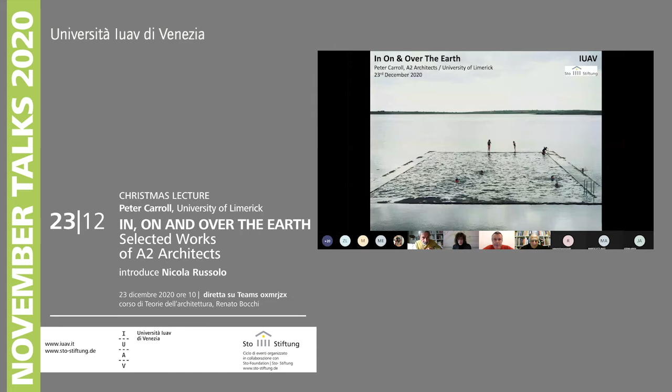So I'll begin my lecture. I want to open with a photograph by Anthony Haughey, who's an Irish photographer. It's a photograph taken in 1996 of a sea pool in Belmullet in County Mayo, the northwest of Ireland, an estuarine bay where a river feeds into Blacksod Bay in Belmullet.

I open with it because it represents many aspects that I have begun to focus on much more in our practice, to do with weather, with the scale and geometries one finds within landscape, but also the relationship between the man-made and the natural. Not to be too simplified about it, but this is a pool, a liminal pool I would say, where you are seeing the moment where the tidal waters reach the height of the contained water within the sea pool.

It's a concrete rim that's showing, but you see the footprints and the action of humans, both walking around the lip of the pool and also swimming within it. So you have this amazing moment where you have a still body of water with a ruffled water surface within the pool itself. For me, it encapsulates so much about landscape being about detail, but also being something epic.

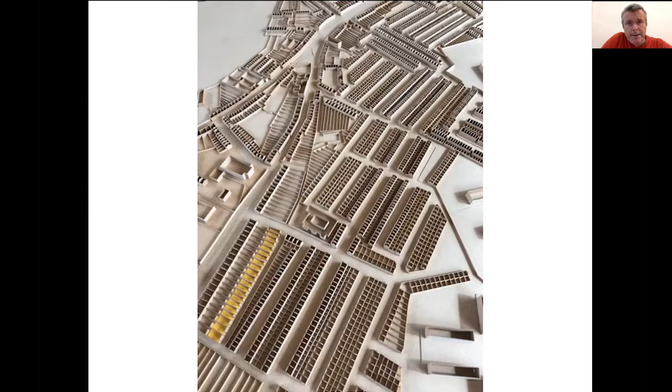So in many ways one might think of this as a very urban project, but I also like to think of it as a landscape project. In order to register that scale of landscape, as Nicola said at the outset, we make a lot of models in our office, and this is a model looking from north to south.

Here you have on the southwest of the image the terrace of new housing we were proposing in the very long back gardens of houses on Oxmantown Street. What we were trying to acknowledge within this model was effectively the 2,000 homes that live very densely—they don't have front gardens, they have yards to the back, and they're tightly packed with one another, making for an amazing sense of neighbourhood, where any nature within that is prized.

Our interest here was very much about garden walls and ensuring that the house we developed for this new lane called Lucky Lane in Dublin 7 was intended to go beyond its plot and somehow inform the context of the urban landscape.

Very briefly, there's a section on top and a plan of the first floor, and on the bottom of the image, a plan of the ground floor. It's a very simple house, cellular in nature on the ground floor with 2 bedrooms, a study and 2 bathrooms. On the first floor you have a very open kitchen, living, dining space.

In the plans of the plots, there's an interest in making more ambiguous the nature of what a plot division is. So you have part of a plot wall that begins in one house, comes along, makes the boundary division, and becomes the envelope for the other house. The intention was to show an extension of the house into the gardens, and to engage with the city landscape proper.

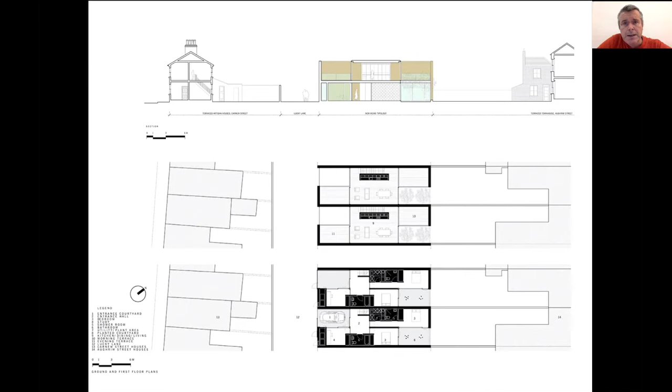In the section, the more cellular rooms of study and bedroom are on the ground floor, and on the upper floor it's meant to register the orientation and the sunlight to the house and to the city proper.

When you look into the house itself, it's very simple in many ways. It goes from plot wall to plot wall. What we were trying to reinforce within the house was an interest in span from one party wall to another.

The windows would be systematic in many ways - large sheets of glass that would move and slide, but would reinforce the relationship of inside to outside with these large brick walls that were reinforcing the plots to the houses.

When you go into the ground floor, as I said, it's cellular in nature. The hall is wrapped in birch plywood. The polished concrete floor goes from room to room so there's no division whatsoever - it's a continuous flow. Likewise, over the doors there are no door heads; the ceiling runs from room to room to give it that sense of expanse.

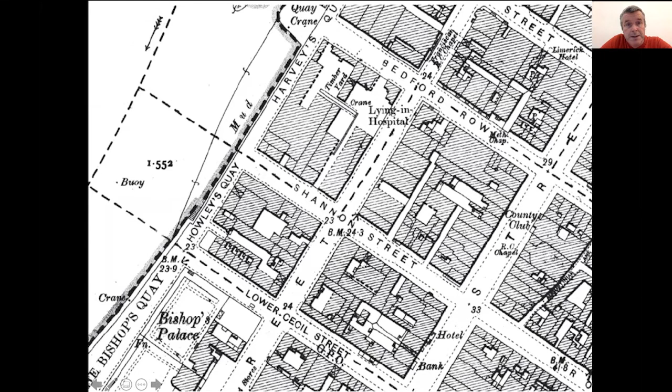What I found over time was that through the opportunity, or the threat, of roadworks and the damage they were doing to the groundscape of the city, all of these culverts and cellars were being revealed through the need to reinforce sections of road. This was a sore point for many within the city, but it was also an opportunity to realize there's actually an incredible substrate to this city that somehow determines what is built above it, but also manages its relationship to flooding, to waste, and to our ability to inhabit and use the public realm of the city.

This was like a moment where I felt there was a whole Roman catacomb system under the city, where you get the top layer of the road simply removed, and you have these amazing brick arches that spring from calp limestone walls to what would be the natural rock level of the city.

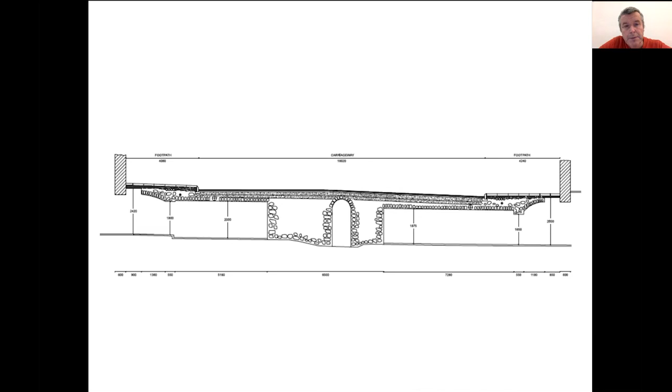When one thinks about this on a Georgian scale, you have this need to make the groundscape. This is a section we did in the university to try and understand a sloping substrate towards the river of the Georgian city, and the need to make a whole system of cellars and culverts that would enable the foundations for these amazing gridded blocks of Georgian construction.

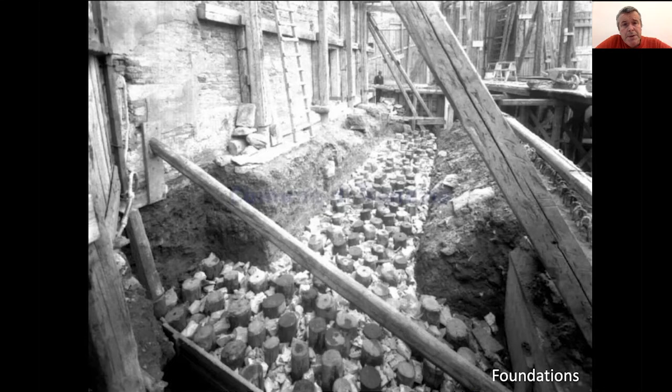Going from that, there was an opportunity 2 years ago to contribute to the Venice Biennale, where myself and Kevin Callahan, an Irish artist, were asked to contribute to an exhibition in the Palazzo Michiel dalle Colonne, on the northern bank of the Grand Canal, just east of the Ca d'Oro.

We started the collaboration by trying to understand again the precarious nature of ground. For Venetians listening, you'll be familiar with this staking or piling of the ground with large poles from trees in order to establish the ground level of the city of Venice. It's always been a very compelling image for me, allowing for consolidation and the ability to spring from a ground condition up.

These are works that were revealed during enabling works for one of the fondamentas in Cannaregio, as I remember. It did reveal a fascinating landscape and substrate to the city of Venice as they began to repair the edges to the canals. So part of this, you can see the arrival of our piece into the Palazzo Michiel.

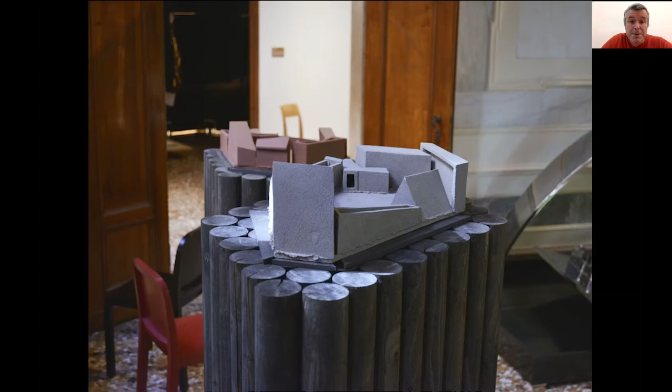What I particularly like about this image is the terrazzo floors and the relationship of our pencil pin points to this particular floor. I did enjoy very much the establishment of these pieces on the ground, negotiating with the Palazzo Michiel the relationship of our piece to the floors. You can see Kevin's pieces then on top of this new datum that we were making for the sculptural pieces within the palazzo.

To go from there to a project that has remained dear to us, in the context of consolidating ground, much like Limerick and our Venetian piece, this was a competition we did 3 years ago in the city of Cork, otherwise known in medieval through to early Georgian times as the Venice of the North, primarily because of its networks of canals used to establish transport through the city.

A lot of these canals and roads are now roofed over and culverted to provide for streetscapes. But the area to the south of this particular map from 1759 by John Rocque is an area known as Morrison's Island. In this map, it shows as mud flats, but prior or subsequent to this map being made, it was actually consolidated in a similar way to the Venetian landscape, where they piled into the ground and edged the island with limestone walls.

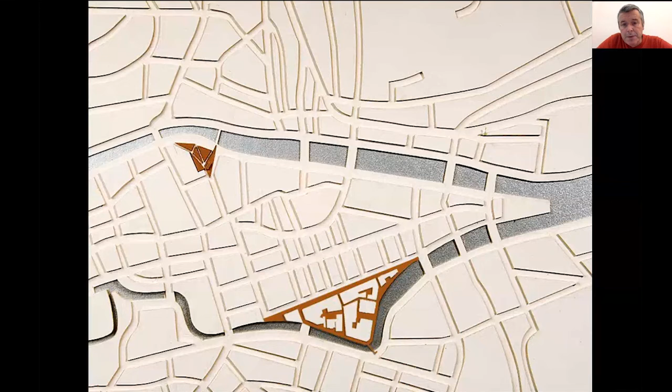One aspect that we started to get very interested in was this notion of using wood for paving. You can see in this image a desire to use end grain woodblock, a hardwood with an impregnated finish, with gravelled and blinded gaps and joints between the timber blocks in order to ensure a permeable surface, so that the ground would operate as a sponge, able to absorb the water coming from both the ground and from the rivers during times of tidal surge or otherwise.

We were looking at cities like Paris, where there is a hierarchy and a relationship from the river level up to the river banks, and then higher up further onto the street levels, where you're getting an integration of nature and planting, but also leisure into the city, and ensuring that all can survive depending on the relative nature of the water level around the city.

We were looking at swales and how to absorb water into depressions within the ground in order to ensure that there was opportunities for water to be absorbed.

We were also looking at corner moments within the city where you might introduce fountains. For the Italians listening in, you'll be very familiar with San Carlo alle Quattro Fontane in Rome by Borromini - forgive me, please. This is one of those moments. I know the interior of the church is a spectacular moment, but I particularly like the civility and the elegance of providing for fountains in corners. It's something that we have in some ways forgotten about in our city landscapes. This is a moment where you're acknowledging the need for a drink of water or the need to wash your hands within a city, and that it's a civilized moment and it's decorated as such.

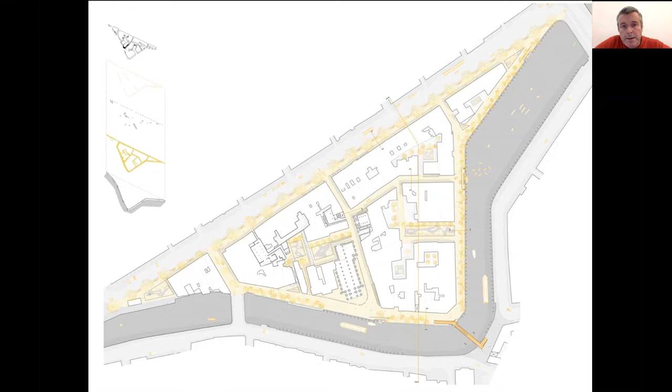In doing so, that opened up the laneways and the spaces between buildings in order to revitalize, as well as to bring in a greater sense of permeability into parts of the city that were not known up to that time, and give it an identity.

So here we were looking at varying levels of plants. We were particularly interested in plants that would deal with alluvial water, as well as the marine water coming in, so it needed to be able to deal with an intertidal water condition. You're getting everything from shrubs and grasses through to plants and flowers, through to fruit plants and through to taller plants, trying to find that balance as to doing as little as possible in order to give a maximum impact. It was a very enjoyable project because it got us thinking about small moments within a city where you can make a small intervention, but it can have a much larger polemical impact by altering people's perceptions as to what can happen within a city scale.

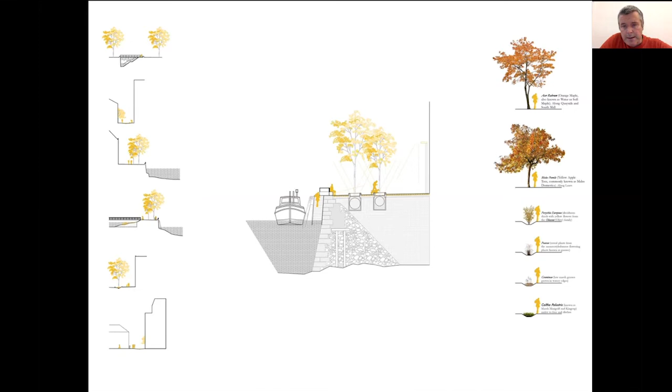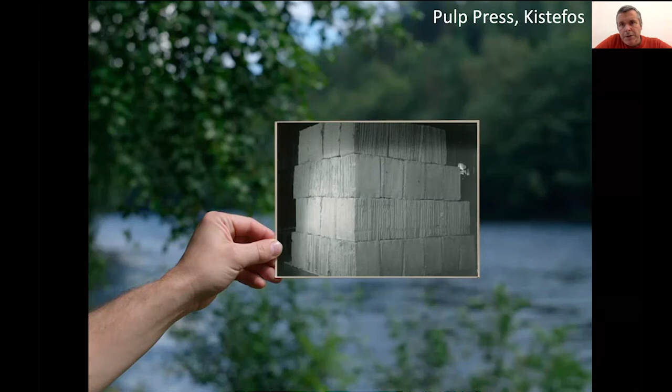Going from that into another project that registers water, this is a project we collaborated on with John Gerrard, the artist. John and A2 Architects were invited to locate, read, and try to register this particular context we were working in. What you have here is a photograph John was holding up, looking towards the river Randselva that passes through Kistefos, and it describes bales of paper.

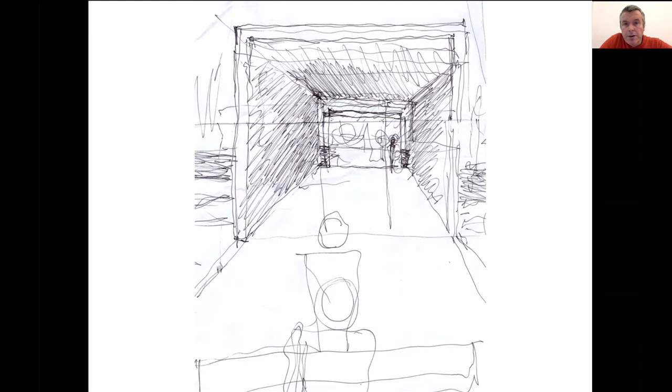With that in mind, we developed an enclosure for one of John's projections. This is a sketch of a perspective looking towards our intervention onto the river Randselva, which flows quite fast beyond the pavilion. It was meant to be a framing of John's real-time projection of the paper mill process, which he did in great detail. But it was also for us to calibrate the relationship between his artwork and the nature it was being placed into - a kind of deep cave, a very simple portal that looks...

We cannot hear you, Peter - your microphone. Can you hear me now? Yeah, okay, now it works. I don't know what happened there, apologies.

This is particularly interesting in its setting in that it looks northeast towards the river, which up to this point is quite wide, and would have been used for the transport of logs down from the forests towards the paper mill plant. This particular jetty would have allowed for the collection of logs as they floated down the river towards the mill. Beyond this point there's a hydroelectric dam, which processed the water and its speed in order to generate electricity for the paper mill.

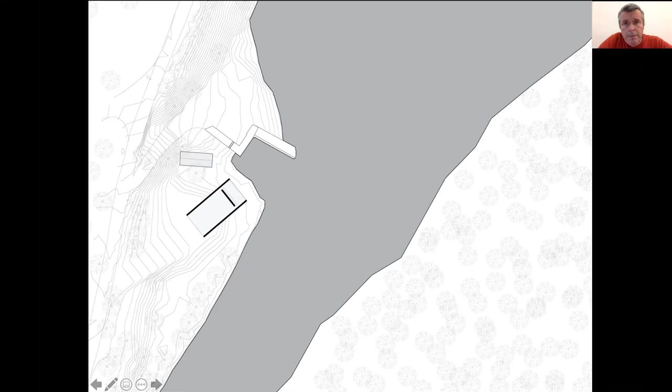Now you might be asking why - I'm just having difficulty going on to the next image. It's not allowing me to go on. Sorry, Nicola. Can maybe try to close this and open again. I'll try to retrieve your presentation on my computer. Yeah, if you could do that. I don't know what's happening here, apologies about this. Okay, let's try. You want me to do it? I can do it. Let me try. Here we go, I have it. Does it work? Okay, yeah, no that's fine.

Thank you. So these are very simple roof plans, elevations, and a side elevation that shows the pavilion - effectively two walls, a ground floor, and a roof. What this ground floor does is register the 50-year flood level of the River Randselva, which was very important since this artwork needed to survive 365 days of the year within a pretty harsh landscape of snow in winter and more extreme heat in summer.

So our project very much became about registering flood levels. We established the height of the pavilion in relation to the river level pretty much from the outset. You can see here the manipulation of the roof plane itself in order to house the projector that would project John Gerrard's artwork.

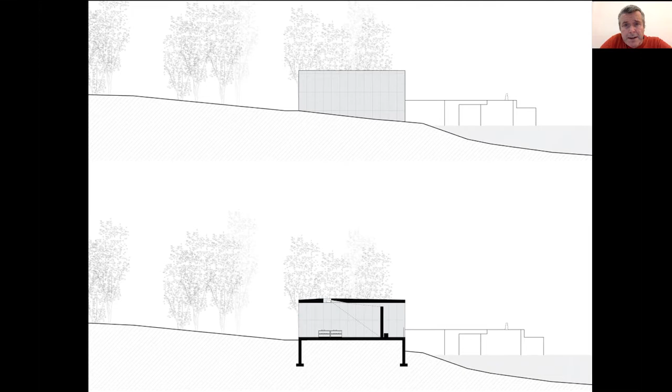It's a very simple concrete box. We showed the patterning of the concrete, and you may see there's a very strong leaning towards Donald Judd's work, particularly in and around Marfa in Texas. We were quite interested in the very elemental nature of this piece.

We carefully crafted John's image to ensure that it would bleed right to the edges of the walls. So you have this almost surreal relationship between the video simulation of the paper mill process itself and the flowing river behind it. It's very much like the sketch that I would have shown you at the outset. It's a darkened cave. We pigmented the interior of the cave with a black pigment in order to allow for the survival of the image.

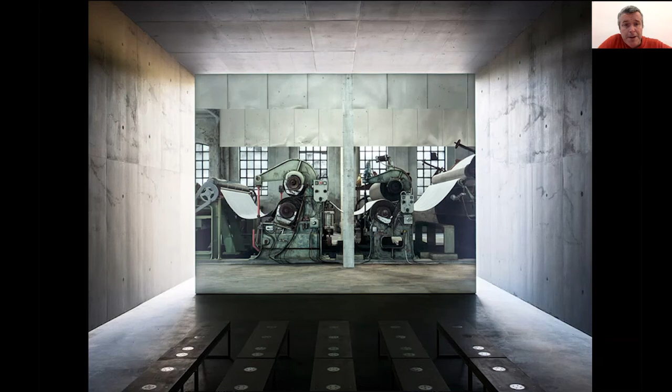Coming further into the pavilion, you can see a number of planks and benches that are made in precast concrete with brass legs and aluminium plates.

Each of those circles effectively are to be embedded with a box, which I will show you in a moment. The boxes basically contain the memory of the video simulation for the year. So it's effectively like a data center or a data bank, where you're providing for a bank of these very simple brass boxes that are to be fixed and connected onto the river.

Every single piece of paper that is made in this video simulation is different. So there was an incredible amount of effort and work done by John to ensure that this was a proper, unique reading, as much as a memory of the paper mill itself.

What I like about this image, again, is just the view that you have to the edge and to the river, where you're both seeing the image of the projection itself, but you're also hearing the river, and what generated all of this paper and the life of the paper mill itself prior to it turning into a sculpture park.

These are the boxes, and you can see in the first year the placement of one brass box on top of these very simple precast concrete planks onto brass legs, which we had made locally.

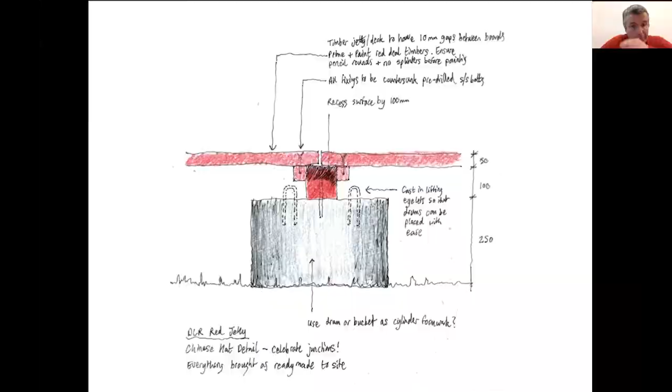These are observations of an action we did to determine how people might use it. There were opportunities when kids would run down the planks, or when foreign students in Dublin would gather for beer or cigarettes, or old people would have a coffee.

The nice thing about this was that it moved around the county for a year. This was in Marlay Park, an area fronting a very beautiful house, an opportunity to place a public bench to inform an edge of a park. Again, every age group was occupying this - it wasn't just for adults, it was for kids as well.

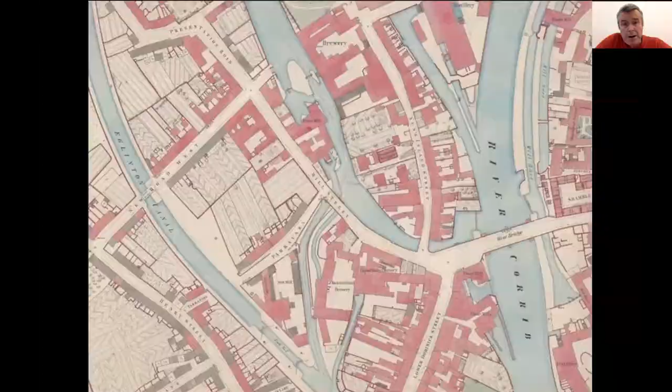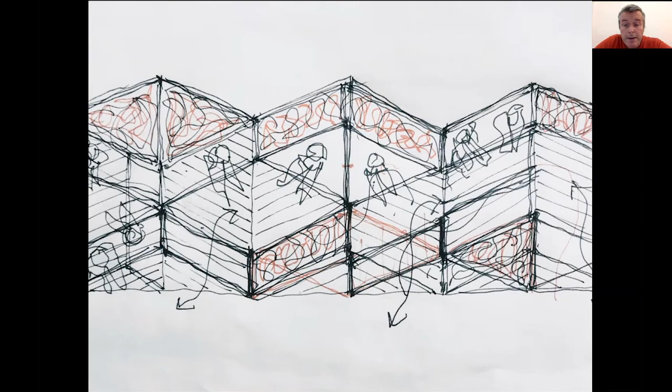This was an opportunity also to look at bicycle stands, and this was what we were looking at for Salt Hill, where we would be making a bank of planters that would protect the bicycles, acting as a crumple zone for cars if they were to crash into this, but also extending the public realm of the promenade and allowing for a herringbone pattern to the flooring of the bicycle stands themselves. What you'll see here is an interest in relief, in profile.

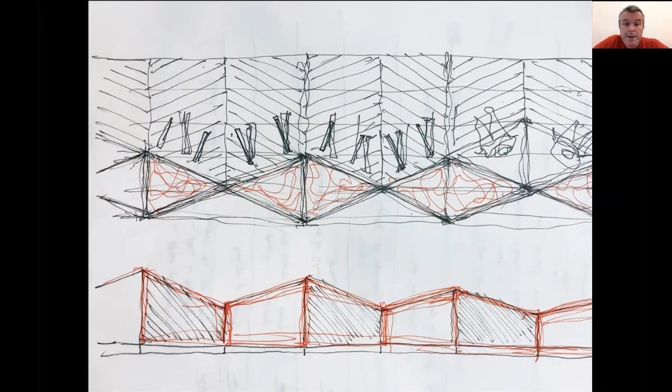We were looking at the work of Constantine Brancusi and his infinite monument, and we were quite interested in the relationship of profile, of landscape and topography, and colour to Galway. Galway is a coastal city on the west of the island of Ireland, quite different to other cities in its very direct relationship to both weather and to its coastal location. So we were very keen to try and find a microcosm to express that condensed mini landscape.

So just a few models to bring you through. I won't spend too long describing these, but these are effectively folding planes that fold in the two-dimensional plan, but also in section, to make for occupied edges.

Here we were looking at the Cruinniú na mBád, the gathering of the boats. There's a very beautiful book called the Galway Hooker, about the Galway boat, and we were very interested in almost bringing that to the imagination of people both living in and visiting Galway, so that they would see that almost clear image in their minds when they would look to something like this. You can see again, it's faceted to both the riverside as well as the promenade side.

So what you're getting here is a number of folding mini landscapes, much like a microcosm of the coast, where you're getting inlets and also islands of planting. Here we are topping the seats with rilled limestone from Ballinasloe, Galway, and we're also prefabricating these units presently in steel, in a marine grade stainless steel that are to be powder coated.

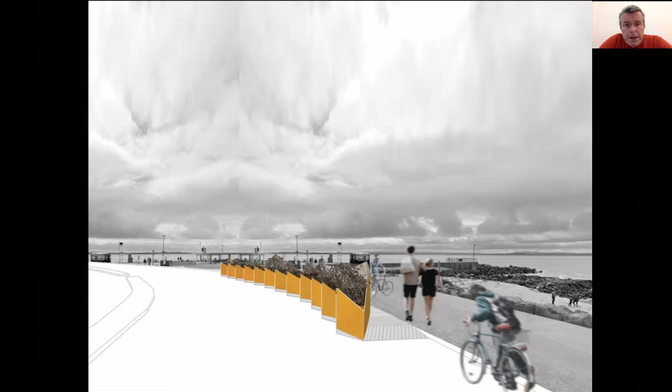Some perspectives to show the relationship of these liminal edge conditions. Here you have the Salt Hill Promenade and its relationship to the road, the promenade on the left, the Galway Bay beyond, and the horizon of the Clare Hills further beyond that. And looking towards a diving point, this is Blackrock at the very end of the promenade, where you look out to the Aran Islands, with the profile of the Clare Hills from the Burren on the far side. Our interest here was in bringing in some granite, given that it's a granite geological base on the Salt Hill side of the city.

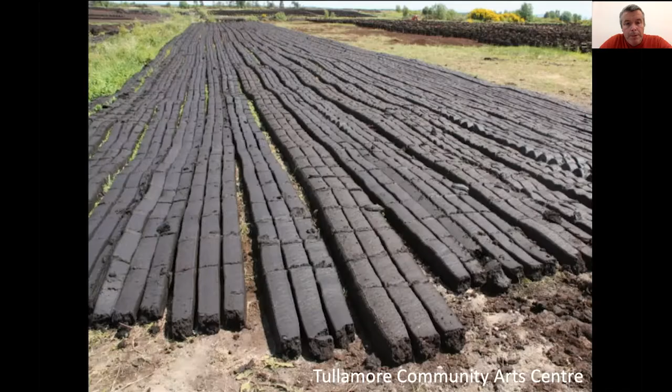Taking you in another direction, this is a project in Tullamore in the centre of Ireland, a competition we won a number of years ago for an art centre. The image I have here is of a bog cutting, where the ground is effectively scraped, and you have these logs of peat, a natural sphagnum compressed into turf that can be burnt. It's a low grade fuel, but it was a very important fuel source for many households in Ireland over the centuries.

What I find very beautiful about this is the striation you get, very much like the maps I showed you at the outset of Stoneybatter, this very strong, almost abstract grain running across the landscape at an unusual scale. The colouring of the landscape is brown, and the scaling of these briquettes or logs of turf, taken from the ground and machined, is in some ways quite phenomenal. The unitised system of these logs is also notable in terms of the increment of a piece of fuel. People come out months later when the peat has dried out to turn the turf and let it dry further, and you get these amazing stacked columns of turf.

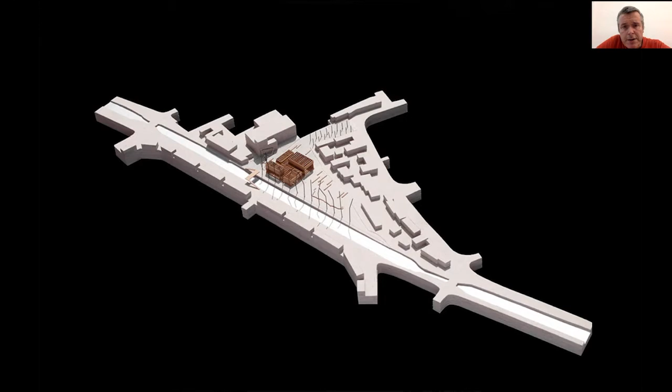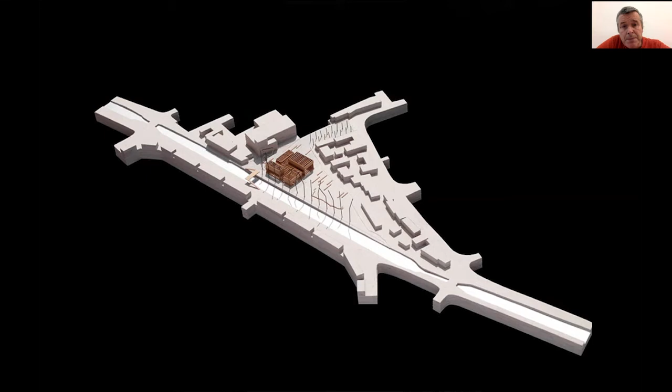It was a site that was unusual, called Kilbride Park, but it was formerly a landfill dump — people dumped domestic waste into a pocket of ground that was formerly a quarry used for building bridges along the canal. The canal park side was infilled maybe 20 years ago, the landfill was topped and it became a park. Part of this proposal was to offer a community arts centre for Tullamore town. So you'll see quite immediately there's an intent here to register the geometry of the canal as it goes through the town, and that was the primary interest we had in this project.

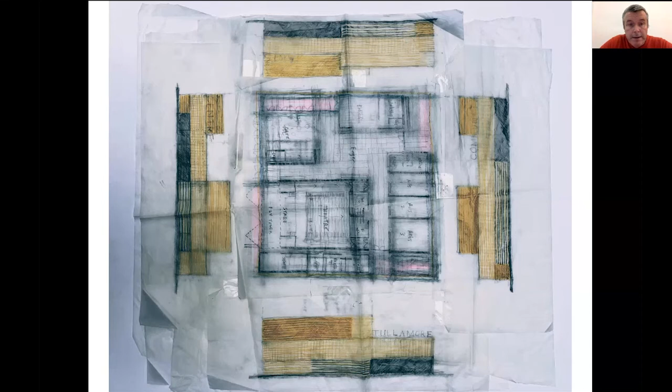So we were placing this very Cartesian, simple form within the park that was square, 40 metres by 40 metres. Within that, we would make a pinwheel, much like the Triskelion patterns of the Book of Durrow, off which you would spin the exhibition space, the cafe space, the theatre space, and the arts spaces. All of the elevations then would somehow register that striated, almost sedimented nature of the bog, and how you might be able to work with horizontal lines of varying densities.

So the setting within the park was very much to be seen as walls as opposed to a building, with a permeable edge. What you see here is an interest to direct various rooms out from this central foyer space and into either of the 4 spaces that we were making, or out into the landscape of Kilbride Park and onto the Grand Canal to the north.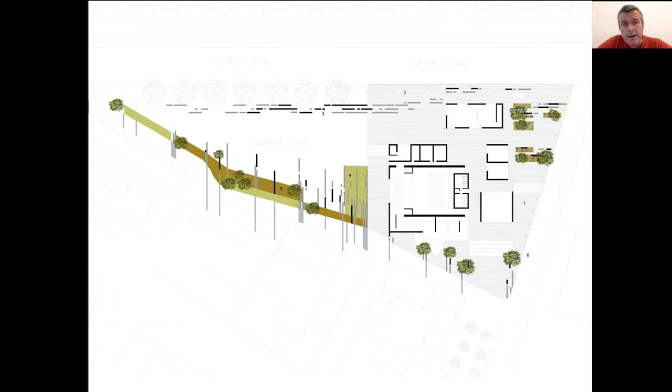So again, it wasn't meant to be just a building. It was a building within a landscape, within a territory, and we were very keen to try and register that almost epic scale of the bog within this relatively compressed site in Tullamore.

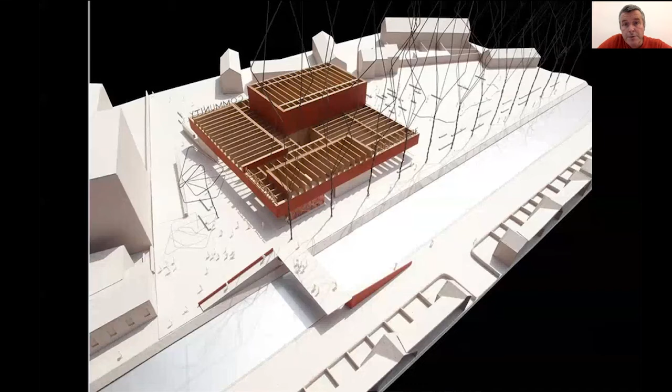And that developed into an interest in terracotta and marl, and we made this floating skirt around our proposal with timber beams that would pinwheel in and around from a central foyer space, making for all of these spaces that would allow people to flow in and around the art centre while relating to this body of water, the Grand Canal, as it passes through from Dublin to Shannon Harbour.

And another view of that. You can see in the terracotta cladding a desire to register varying densities of terracotta panelling onto the timber structure of the building itself, which had this concrete socle.

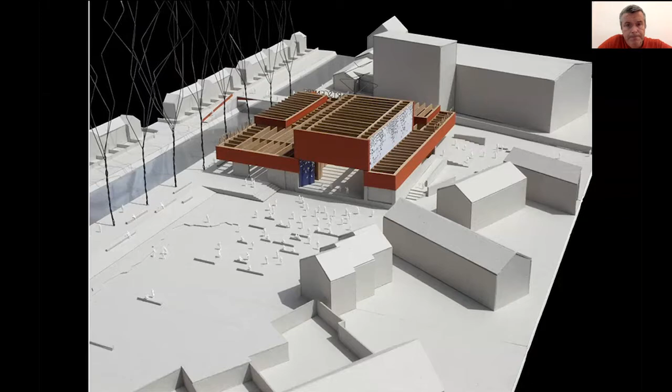Speaking of lines in the landscape, this is a house that we would have completed a year and a half ago now. And this photograph, I suppose, tries to establish and register a critique of housing in Ireland, particularly in a rural setting over the last number of years. We have, one would say, blighted our landscape with many bungalows, which are generic, carbon copy cookie-cutter housing from pattern books almost, where people would just be given permission to build a house. And they've become the norm, unfortunately.

That has slowly become something that, as a practice, we have begun to criticize. I suppose this was an opportunity here to make a house for a couple who wanted to live in relatively close proximity to the landscape itself, and also to be able to register things at great distance, such as the Twelve Bens or the horizon of the water beyond the house. So there was an opportunity to make something that would be quite small in its footprint, but allow for the landscape to be taken in at a much greater scale.

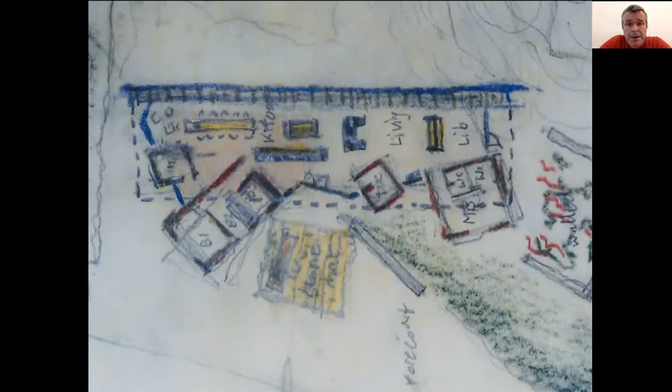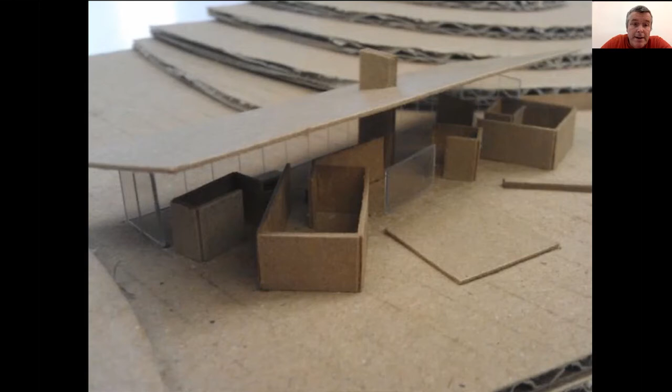Just to show you two sketches as to how it would have started. The house itself started as a number of erratics or blocks that would have contained the bedrooms, the toilets, terraces, utility spaces, and towards the sea front we would have placed this glazed screen. That was modelled in a way almost like a large monopitch of Liscannor slate that would fall down towards the sea, but that would open up to the back of the house to the south, with all of these protected spaces for planting. The clients didn't buy into it, unfortunately, and we had to go through many iterations and arrive at a very enjoyable conclusion, I think.

Just to show you a number of photographs here, this was a photograph of the house under construction. I think the moment of truth came where we were making a beam that was the first move of the house, lightly supported on piers and columns that bridged the valley of one hill to another, in order to allow for this house to read like a table or a tabletop, and somehow that the living would happen in and around and under this new tabletop that we were making.

And that primarily, I suppose, is where the title of the lecture comes from, In, On and Over the Earth. This is again an interest in ground, an interest in reading and making legible the ground and the landscape, and also being able to ensure that we make spaces that relate not just to the detail, but also to the larger scale of the landscape itself.

So this is the house as it was completed, and you can see here the meadow comes up from the seaside right up to the house proper and acts like a datum in a very simple way. It's a 42-metre long cast in situ concrete beam, and it rests on either side on masonry bars or blocks, one for bedrooms and the other for utility.

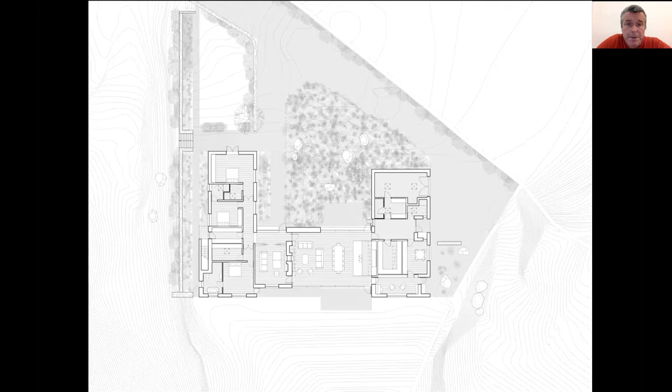Before showing you that, I suppose it's the relationship between the green of the hills and the varying strains that one would get over the course of the year into this very beautiful serpentine Connemara marble, which is local to the house. The clients were interested in its map-like quality, and in a strong relationship between the landscape as it comes through the house, registering both the green and the textures you might find within such a landscape.

And then to the other side of that fireplace, you have the sheltered courtyard and a much different landscape, very much about plants and shrubs that would only survive within a sheltered landscape. But you have this very simple through view, I suppose, which is the most important thing I'm trying to communicate, where you're going from the seaside through to the sheltered courtyard, with the ability to register both scales within one room.

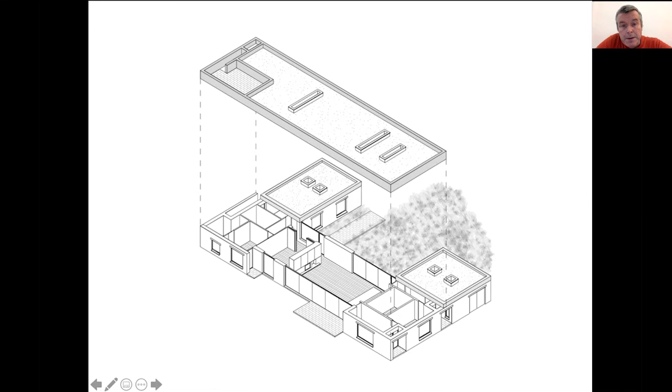So this is an axonometric of the space that shows the 42-metre long ring beam over the main space and over the two bars that allow for an intermediate space to be made. And again, you have a floating wall, much like Kistefos, where the marbled cladding sits over the fireplace mantelpiece.

So looking from the sheltered courtyard towards this magnificent bay, you do get these opportunities to look through the house and to see the scale of landscape from one side to the other. And you get the most dramatic west setting sun opportunities in this house, while making for a very different landscape to the southern side of the house, which is very much like a microclimate or walled garden.

The furniture within the house is ultimately very monastic in many ways, made almost like large blocks or altarpieces, where the island of the kitchen and the tables are made in large, solid, chunky material in order to allow for that scale not to be lost within the scale of the landscape.

And during summer months, you get these beautiful bursts of nature where you're getting very diverse plants, local plants at that, where white thorn trees and flowering native plants are encouraged to grow within this particular microclimate.

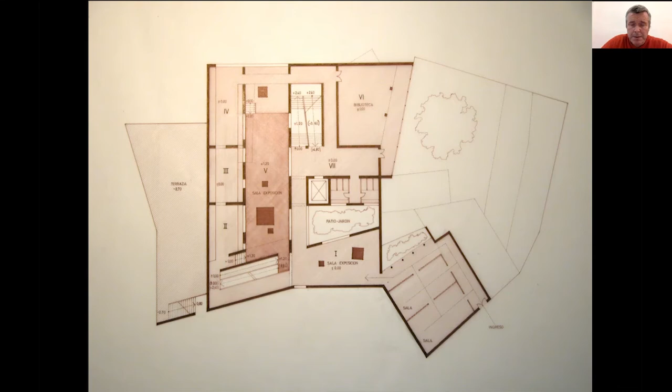In some ways, it's like a Hellenic piece of work where you're making a temple, but a temple space that is darkened and gets light from its outer edges. So you're getting a thickness of room around this very interesting exposition hall in the center of the space. We were interested in that, the whole notion of a spiral or coming around into something, which greatly attracted us. So we started off with sketches looking at the ramps and the thickness of spaces between walls that somehow enveloped and enclosed this darkened space of the main exhibition hall.

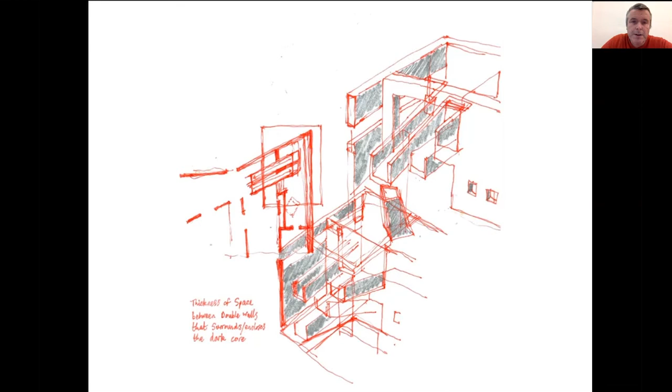So in effect, we were being asked to interpret a building and to ensure that people would have a close encounter with this particular work by Oteiza. Rather than just keep it to Oiza, we decided we would try and bring the work of the sculptor into the work. You get these amazing opportunities to come through perspectival space where light is guiding you, where movement and color are introduced, where energy is brought in. It's very unusual that you get this kind of monumental treatment of circulation.

What it did register within us was this interest in epic landscape of lines, of geometry, of metaphysics of light and existence, which greatly charmed us. And you get these amazing spaces in and around that exhibition hall.

These are roof light side galleries around the building, and you have them done in a kind of blue steel that allows for this diffuse light to come into the side spaces. So you have all these punctures through into the darkened space in the center, with the ceilings painted out in black in order to allow for the survival of the objects themselves as they're being artificially lit within the space.

So again, we would have made a lot of models, test models, looking at the shield or the contended space of the outer shell, and then the inner space, which was very much about a containment of works like models that we would have made.

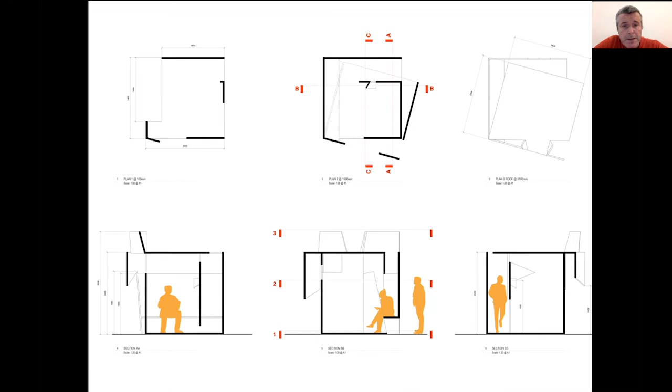So these are just some of the drawings that we would have developed for the piece. It's a very small intervention within a collection of other interventions within the room. There were 15 of them, and we couldn't go beyond 3 meters by 3 meters.

Within this particular piece, we decided we would engrave certain aspects of the work onto the elevations to the side. So we 3D printed, or 3D scribed, the Battle of San Romano onto one wall. There was another panel engraving, which was an ode to Oteiza. The plan of the building was also engraved, the foundation, and then also the setting of the relationship in Arantzazu.

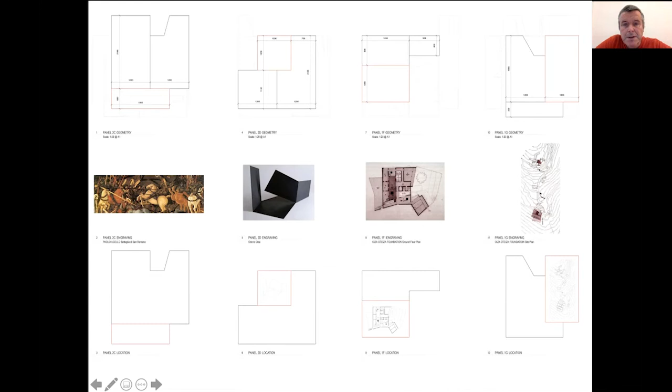Of the foundation building and the town proper, and all of the interventions that Oteiza would have done throughout his lifetime within that town. So just very quickly, to show you a number of slides of the piece as we saw it.

You'll just about make out the engraving of the Battle of San Romano onto the side. We didn't want it to be overt, and we wanted it to be quite discreet, so that people would pass by it and perhaps see an amount of reveal, almost like a frieze that was worked into the intervention.

We also placed a number of models at varying scales. So there was the collection of iterative Oteiza studies that were integrated, and also a larger black model of the piece, where we were interested in looking at the circulation space between the side galleries and the main space.

All in all, you can begin to see an interest and a desire to engage with the work of Oteiza and the making of a lot of his abstract sculptures. While we were making a space, we were very conscious not to ape or categorize his work into a piece of architecture, but we were interested in trapping and making energetic our piece by referencing his work, I would say.

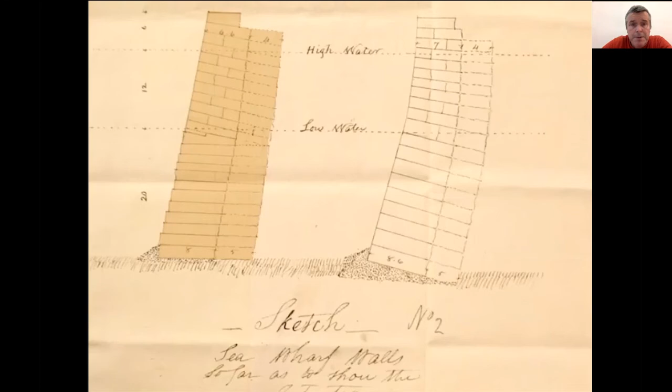So you get these incredible constructions around the harbour, and it's something that registered fairly quickly with us, that almost every surface was leaning or battered. You have these incredible stone constructions, either from rubble stone or from ashlar cut stone, where you have staircases that are almost surreally going down at an angle, but made so precisely in order to withstand the force of water and how it might interact with the built edge.

So on one side you have a train line, and you have People's Park, which is a very beautiful park that connects Dún Laoghaire town to the coast. Then there was the separation of the metalworks or the railway lines, and then you have the pavilion. There would have been probably a greater relationship between the park and the pavilion proper of our baths complex, but you'll see that there is not much interaction between the streetscape and the baths complex itself.

What you do have is this series of terracing of platforms down to the granite outcrop, where you have the sea coming in and varying grades of wall and defence as you make your way up towards the street.

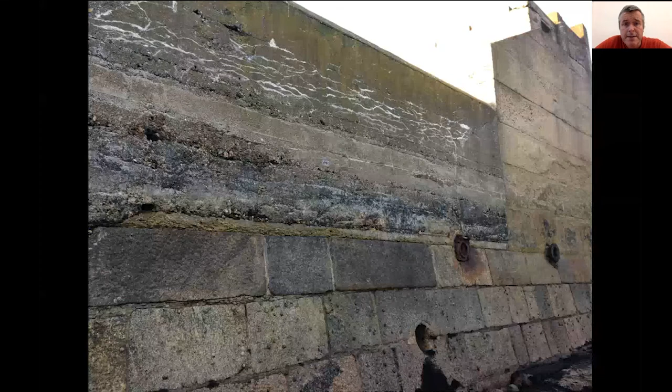And again, opportunities where you're getting this sedimented layering of concrete placed onto the Wicklow granite ashlar constructions for the building edges and the jetty edges as it would have been planned previously.

So our project in many ways began, there's a plan of the upper level on the very far bottom left or bottom right of the image. And on the upper part, the main drawing is basically trying to contend with what we had to remove in blue and what we were to retain in red.

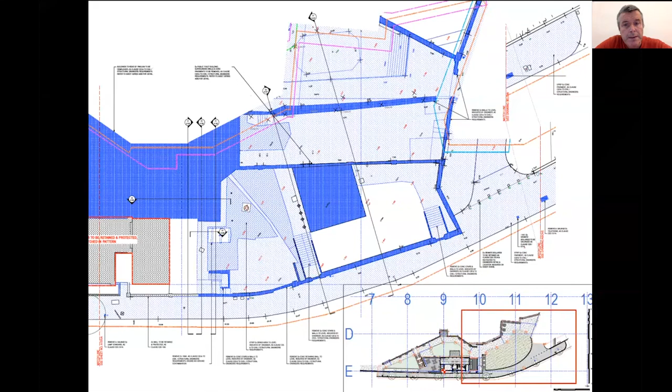And there were sections of walls that we just couldn't keep, and certainly outbuildings that weren't of value. And we had to try and ensure that we weren't wiping away everything. So there were judgments being made on this kind of landscape as we worked through it.

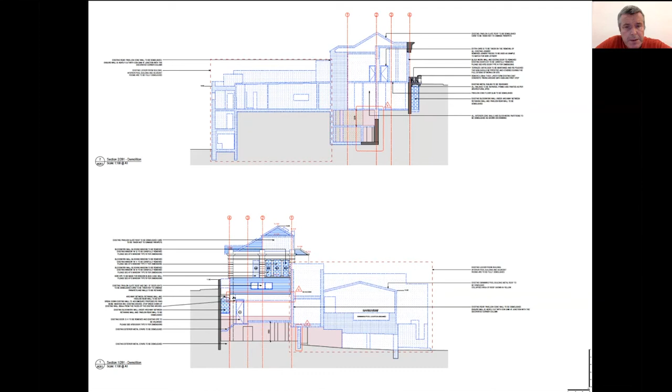And also with the pavilion proper, we were having to remove quite a lot of the interior because it was fire damaged and effectively infested with pigeons, and that meant a very dangerous environment. So we tried to keep as much as we could of the shell of the building, while ensuring that the memory and the future use of the building is retained.

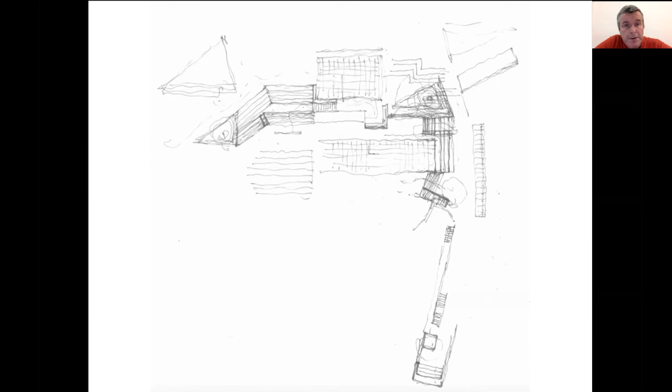So some light sketches to start to show our intervention, where we would make for a series of walkways and access and counter access across the site in order to encourage permeability and to allow for people to be able to sit and find some solace within the town of Dún Laoghaire, and to allow for a greater enjoyment of the coast with bathing in mind.

So we made for this model, a model at a landscape scale. To the left of the image, you have the pier that extends out into Dublin Bay with a pedestal for a sculpture of Roger Casement. To the right, you have the pavilion, which we are effectively reinstating and remaking.

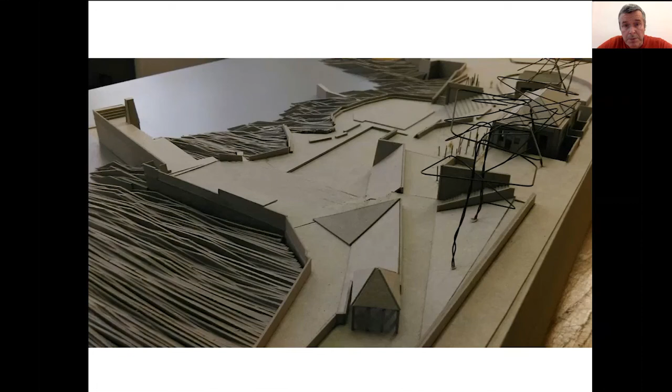In between that, you have a series of walkways: one at a high level onto the street with terraces for the cafe, one at the intermediate level, and one at the lower level. So there are three levels within the project, around which we are making walls and lines in the landscape to ensure the waves can be withstood, but also that people are carefully orchestrated through the site with movement and a sense of enjoyment.

A number of the models we made—this was a more developed model of the fourth facade of the pavilion looking towards the sea. We were able to keep the three side and front elevations onto Queen's Road. This model tries to show the connection from Queen's Road down onto the intermediate level.

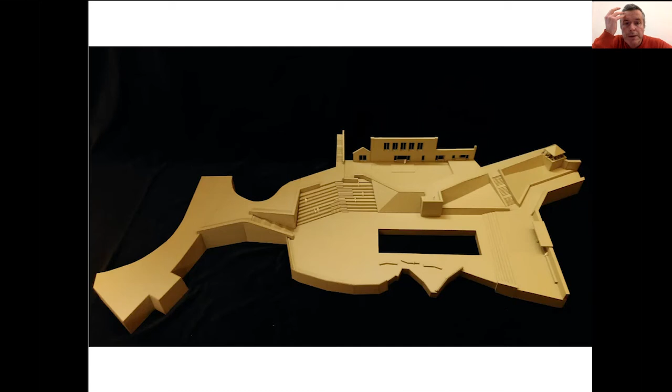And a new amphitheatre onto the sea that we're making with a sea pool and various outposts or lookout points along this intermediate level, from the bandstand on the right-hand side to the staircase leading down from People's Park, then onto a central lookout point and further lookout points to the other side.

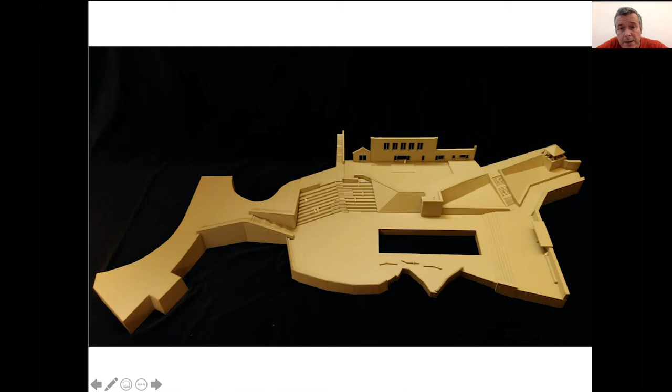So what you're getting here is a three-layered or three-tiered project that goes from the pavilion down onto the intermediate level and then down onto the sea level. And another photograph of that as it's developing.

So a lot of our project was about walls and making sure that the walls were able to withstand the force of nature. In some cases, the walls are up to 1.5 meters thick, and in certain places 2 meters.

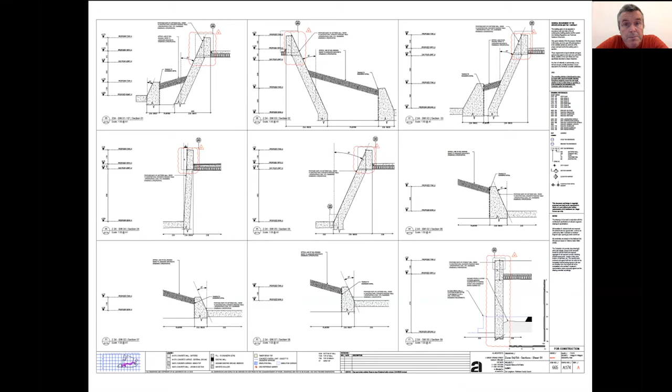Again, we were trying to ensure that the biodiversity of the area would be integrated and accommodated. A lot of the maritime gardens of Scotsman's Bay are intended to flow into this particular pool complex. But we had to contend with a hierarchy of walls from a low level at sea side up to the pavilion, and we were keen to ensure that the batter and angle of all those walls would be registered and experienced.

So we made a lot of models—these are test models in concrete. This was looking at the kind of day pours that one might get in a concrete wall, and allowing for a projected lip to come out to give it a scale. It was a test model we didn't develop any further, but it was certainly an interesting moment in the project.

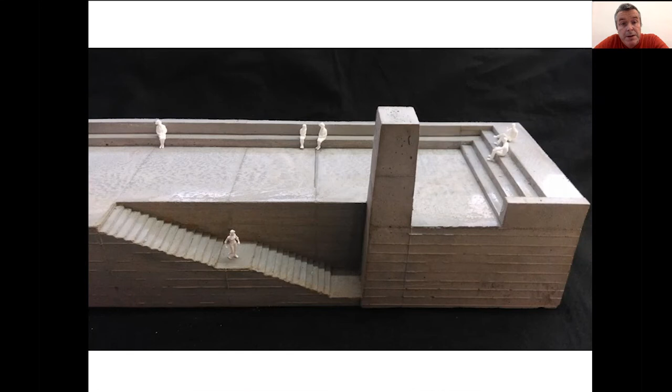We were beginning to cast and make parts of the model and parts of the project with concrete. This was looking at the jetty, and we've now ended up with a round tip to the jetty that mimics the Martello Tower in Sandycove in the distance.

But just the energy that one might get by making a set of steps down to the water level around the monument, a very long bench that skirts the inner, sheltered side of the jetty from the winds, and a notional idea of steps up to a platform that would allow swimmers or people to dive from the edge of the jetty. How one might make a landscape of masonry, of poured in situ concrete, in this case reinforced, with one material, and make it something robust and of a scale that is registered in the landscape.

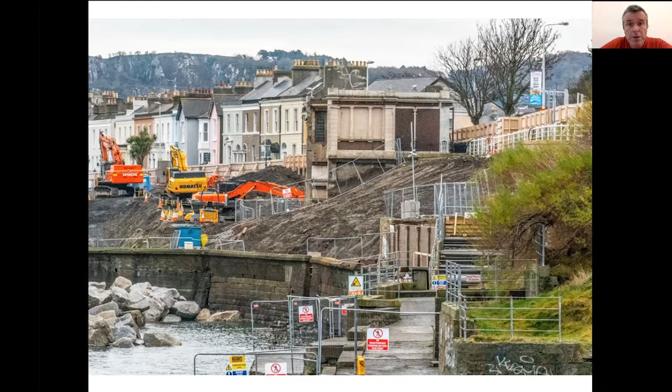So I'm just going to show you a few photographs of the project as it stands presently. This is from a number of months ago. In the background, you can see the quarry of Dalkey. A lot of the stone we're using in the baths is quarried from that particular area of Dublin. It would have been the source of much of the stonework for many of the fine buildings in Dublin, and certainly the paving of Dublin would have come from Dalkey quarry.

You can see in this photograph that it's a Victorian setting, some very fine dwellings of two to three stories in height that make for a promenade along the edge. But we're having to contend with quite a steep fall from the Queen's Road. You can see the railings on the right of the image, where we have our hoarding in the trees. That's the street level, and we're effectively having to come down up to 13 meters from that first floor.

Down into a sculpture area on the ground floor of the pavilion, and then down further on. So there's been quite a lot of earth movement and clearance, while also trying to retain as much as we could of the aspects of the site that we felt were of value and could be retained.

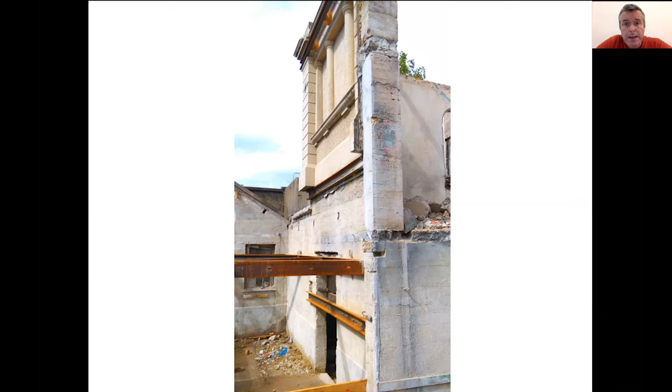So this is the pavilion as we stripped away the parts that were affected. A lot of the walls had embedded steel that simply had corroded and had to be removed. So there was a lot of trial and investigation in order to try and understand how this pavilion might stand. There was a lot of temporary works, and everything you see in that photograph is now retained.

And what was very interesting about this, much like the walls that we would have found in and around the site, was this layering and palimpsest of crude material through to finer materials as you went to the top of the pavilion itself.

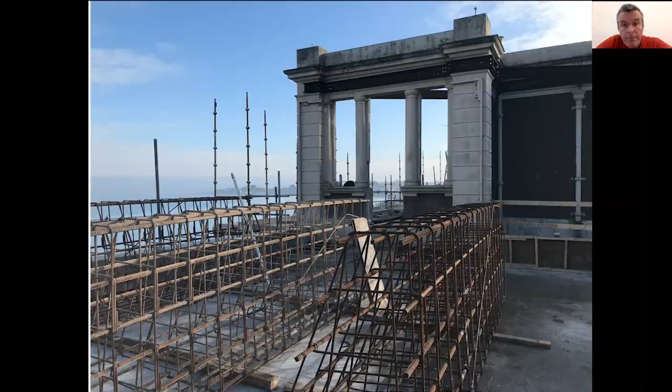This is a view of the cafe terrace as it's going to be, looking at the east side of the pavilion, looking towards East Pier, and you have the Martello Tower behind the scaffold, which I'll show you in a moment in a few photographs. But it's an important screen wall in that it has this very simple tripartite division, and we cut down the centre place in order to allow for a doorway to come from the cafe, a public cafe, out onto a public terrace.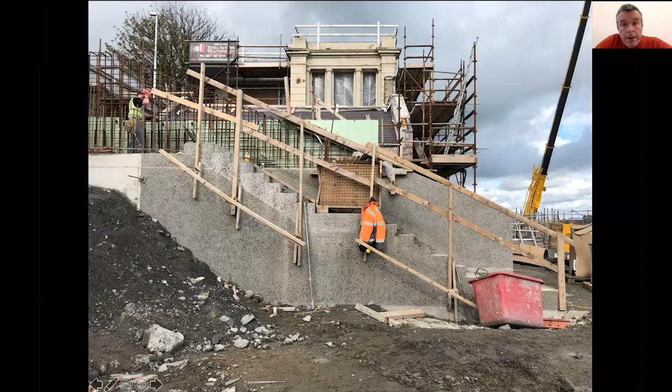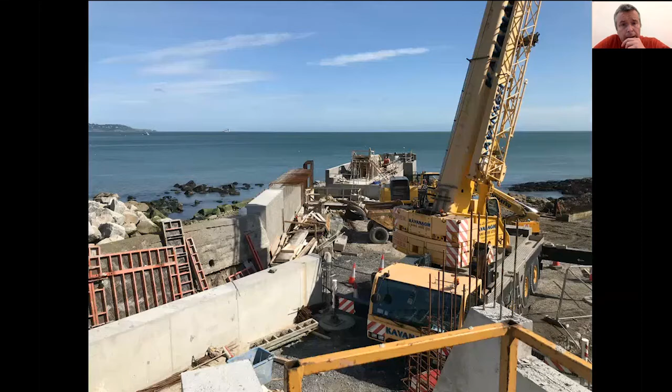Again, a lot of it is working with existing as well as working with proposed constructions. You'll see from the concrete we're exposing the aggregate, and a lot of that is washed out. And that's used throughout the site.

And just some of the energies that we're beginning to find and generate within the site itself, where we're beginning to crank and break certain directions and lines within the making of this jetty. So you're getting this shifting view all of the time, and coming down and descending as well as ascending up from the jetty. It's beginning to offer some very interesting and dramatic relationships.

That's all at the same time as thinking of this amazing horizon line that we have to play with. And again, coming back to the scale of the epic landscape I was referring to a moment ago, this is not a small project by any means. You're having to contend with a much, much larger scale.

So the stone and the work, this is the Dalkey granite that is mixed into the concrete mix. It's quite a challenging concrete to work with in that it's 50% GGBS, which is ground granulated blast-furnace slag, a recycled material, and we're having to whiten the concrete slightly with that GGBS. But what's quite beautiful about it is the aggregates that you're getting through from retarding the surface and washing the surface of the concrete 24 hours after it being set.

As well as that, we're having to externally polish the footpaths. And here you're getting, again, all of the local stones as well as the Dalkey granite in the aggregate mix, ground down enough to give a slip resistance. It's not a high polish, and effectively it will be something that will be able to be exposed. And again, we were finding the detail and the kind of beauty of what you grind and what you find within a stone mix like this to be a really beautiful part of the project so far.

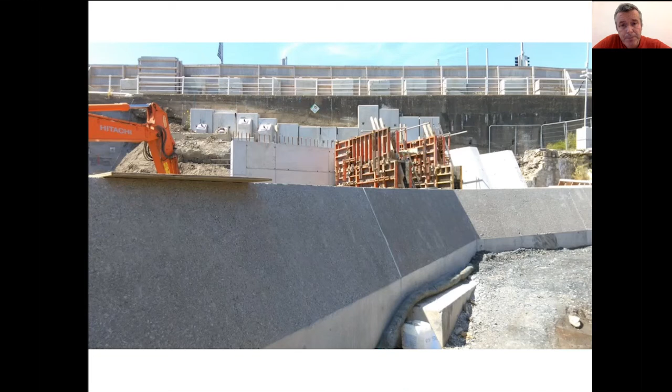So we're beginning to introduce a number of cranks and bends and twists within the project. There's a lot of heavy civils work going on in order to reinforce and strengthen a number of the existing retaining walls. And there's also this incredible, almost Colosseum-like baffle system of walls underneath a number of the battered walls. And it's almost sad to have to cover them up.

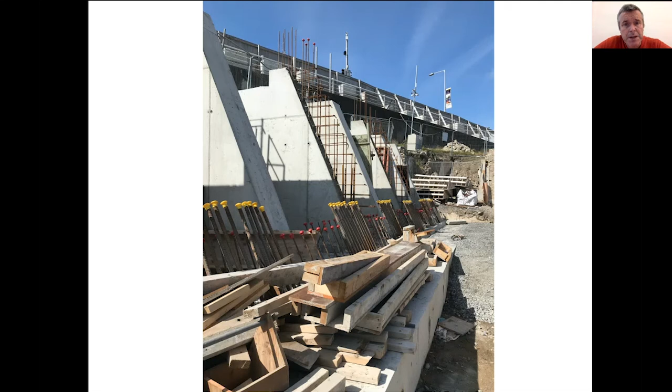I would have loved to have exposed this almost gargantuan scale to the force of these walls and what they have to withstand with regards to the waves that hit them. But it's been a long process to ensure that the project can withstand the force of nature for the next 100 to 150 years.

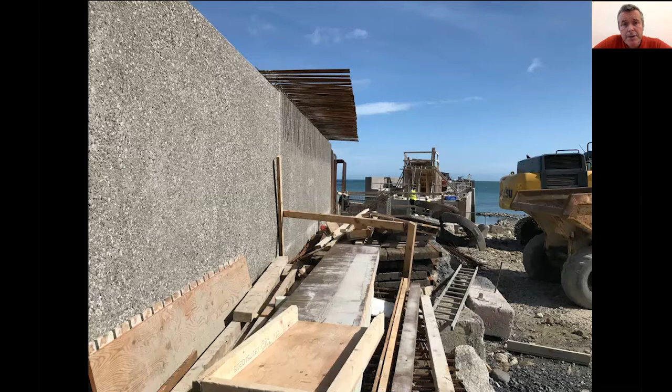So a lot of the walls are quite massive, big, bold walls. We didn't want any secondary detailing in it. We wanted them to be very simple and very forceful in nature. And there's a hierarchy of walls relating to one another, some low walls to middle scale walls to high walls, and there are opportunities for overhangs as well for shelters.

So there's going to be a bench cast underneath a large cantilevered concrete roof here that allows people who are going for a swim to change under shelter and to allow for a pleasant view and seating that faces south. And there's going to be other opportunities for small beaches.

We're making a number of inlets and small pockets where we're casting benches and steps of a much larger, more monumental scale to the edges and allowing for natural sediment to happen over time.

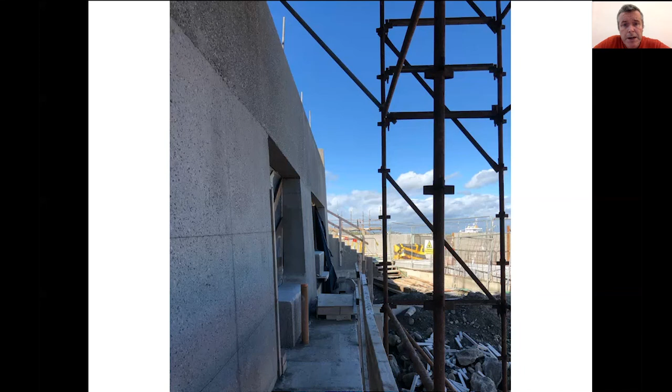Up onto the pavilion, we're casting a ground floor height wall with a very light batter, a very small canted angle, again with very simple pour lines and castings, and we're integrating benches into all of the openings along the bottom of the windows in order to offer an opportunity to sit within the building while being outside.

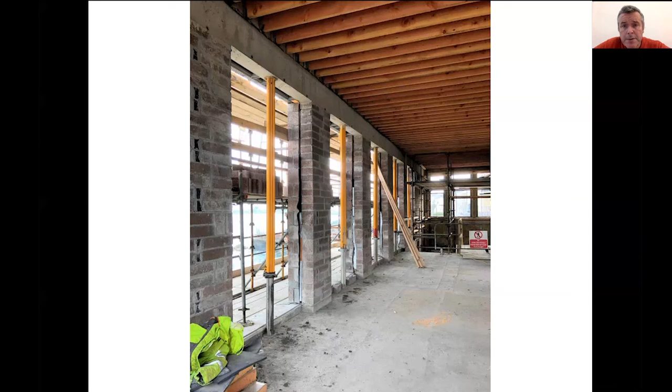Internally, much like a Venetian hall of a palazzo, there's a long, deep room from one side of the pavilion to the other, and we're making a series of large opening doors out onto small balconets on the seaward side. We were keen that the interior would somehow have another scale or a finer increment.

So we're making this timber as an exposed timber roof that's going to be painted white with very simple lighting and a polished concrete floor that leads down to the ground floor.

You can see at the end of this view there's a staircase that will bring you down to the artist studio area of the pavilion, and the railings to the interior of the stairs will be bronze.

This was just a mock-up to show the profile and the sections we were trying to achieve, but it's very much in the kind of scale of a public room, a very simple scale of repeated trabeated roofing with a very simple floor to ceiling height.

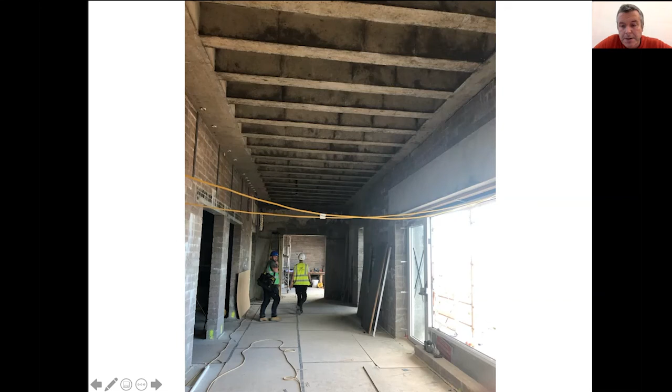And then a workshop to the side, which we had to rebuild in terms of the roof and the front wall, in order to allow for a rooflit space for a sculpture studio or sculpture workshop with a very simple square opening out onto the intermediate level for public to be able to come and go into this public space.

So just a few final photographs I'm going to show you. These are just photographs I've taken over the last number of months.

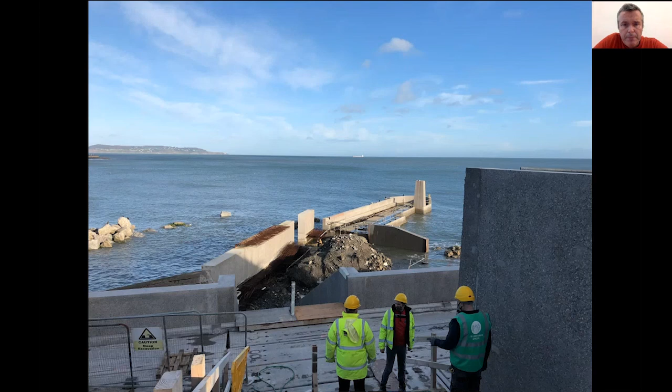This is looking from the stairs coming down from Queen's Road from People's Park, and eventually the view you will get out onto this pedestal with the sheltered roof coming out over the changing area.

The sculpture that will go on top was made by a very interesting English artist called Mark Richards. He has made a bronze sculpture that will be arriving into Dún Laoghaire in the next number of weeks to months, that will be placed on this pedestal.

It's Roger Casement, one of our great patriots, walking towards the coast as opposed to towards the United Kingdom that we face from Dublin towards the east.

The last image I have here is just the monument and the registering again of the landscape from the point of view of the horizon, but also relating to the Martello Tower to the right of the image there, and somehow making dialogue with distances and with scale in works that we're continually ongoing with.